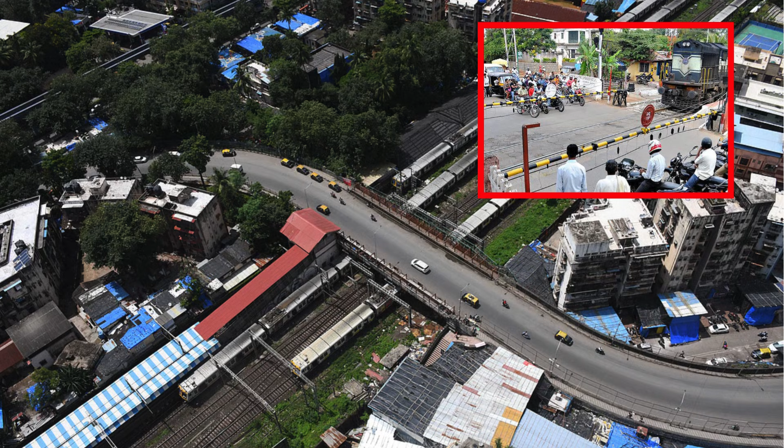Road-over bridges, also called ROB or flyovers, are frequently provided to cross railway tracks without having a need to wait for opening of a level crossing gate. They provide direct access across the railway tracks.

But once a decision is made to provide a road-over bridge, the next immediate question comes: what should be the width of the ROB deck? This video is about the same question. Watch till the end to understand all the three cases.

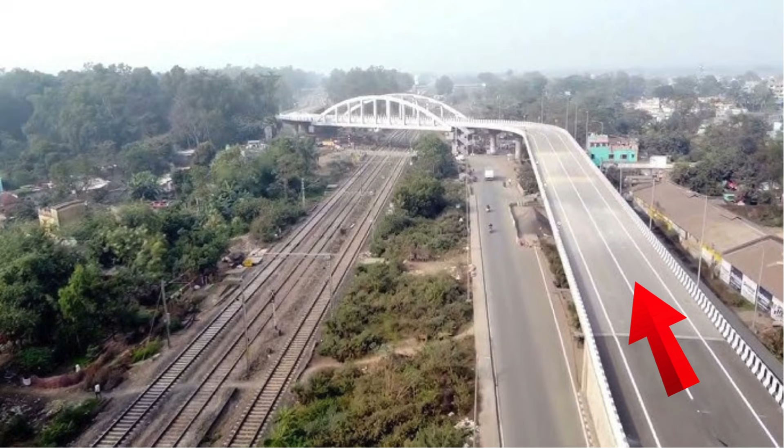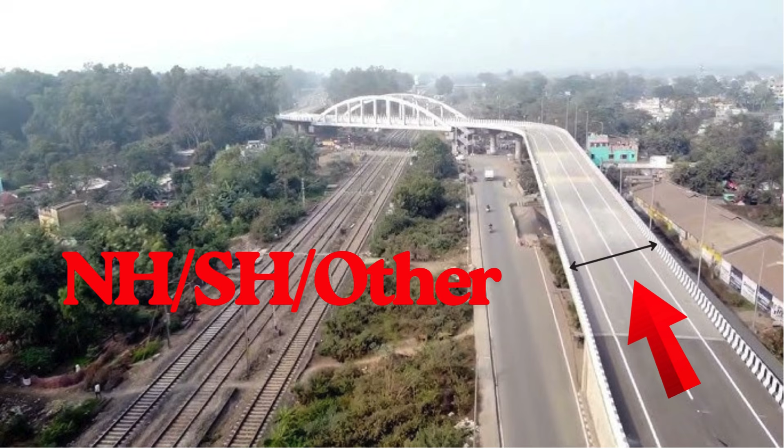The deck width of ROB is decided based upon the approaching road, whether this road is a national highway or a state highway or a major district road or a local municipal road. Basically, the carriageway of the approaching road or the type of highway decides the deck configurations of these ROBs. There are standard documents published by Indian Road Congress which can be followed to have guidance on this matter.

Bridge deck configurations of 6-lane and 4-lane national highways and 2-lane highways have been defined by Indian Road Congress, IRC, in special publications, SPs, published by them. The details of these special publications are as follows.

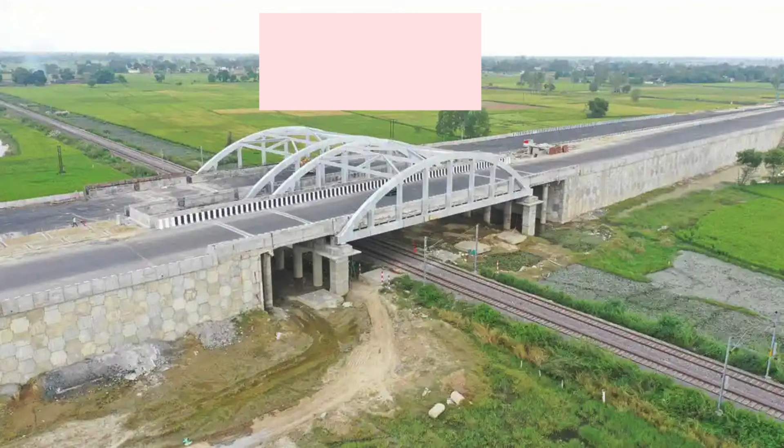6-lane and 4-lane national highway bridge girders are normally provided in twin arrangements. It means that for 4-lane highways, 2 lanes are provided on one girder and the other 2 lanes are provided on the second girder. It helps in minimizing the disruptions of traffic in case any emergency repair is required in one of the girders.

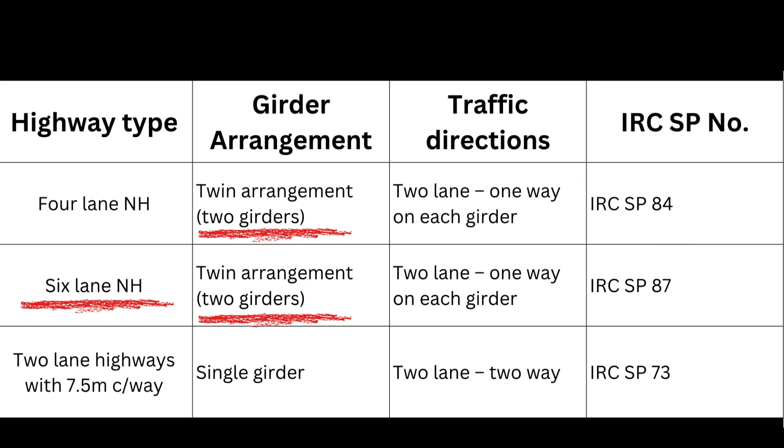Bridge deck configurations for 4-lane, 6-lane national highways and 2-lane highways are given in IRC SP 84, SP 87, and SP 73 respectively. Now we will discuss their deck configurations one by one.

Bridge deck configuration of 6-lane national highway is given in IRC SP 87 as shown here. As mentioned earlier, the arrangement is of twin type, 3 lanes on one girder and the other 3 lanes on the second girder. Each girder serves one direction of traffic. The carriageway provided on one deck is 14 meters. Footpaths of 1.5 meters clear width are provided on both extreme ends of the 2 girders as shown.

At both extremes of deck, 2 RCC crash barriers have been provided of width 450 millimeters. 100 millimeter extra projection of deck has been provided at both ends. The footpath and carriageway are separated by a double W-beam barrier of width 400 millimeters. If we add all these elements, the total RCC concrete deck width is calculated to be 17 meters.

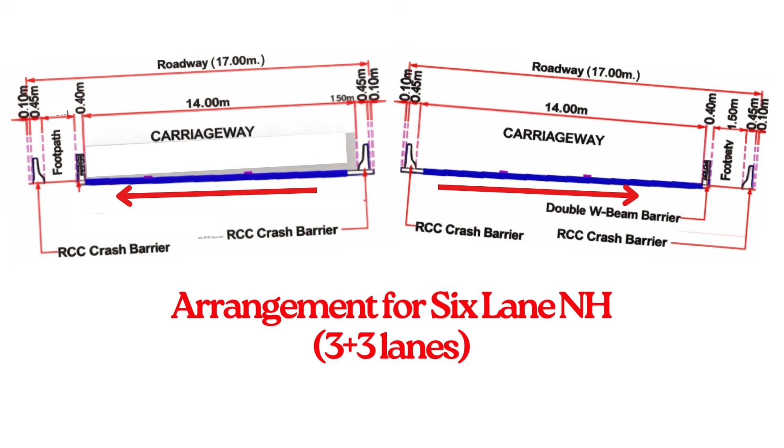One side slope has been provided in both girders. The direction of the slope is towards the outer side. So in short, it can be said that this deck has an overall width of 17 meters to accommodate a carriageway of 14 meters.

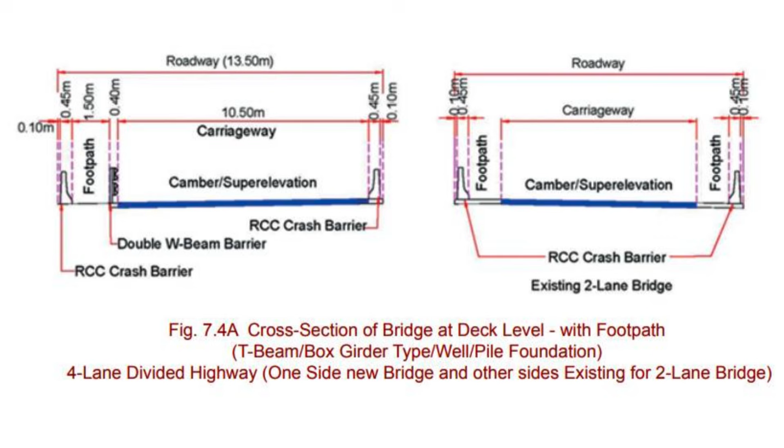Bridge deck configuration of 4-lane national highway is given in figure number 7.4a of IRC SP 84. As mentioned earlier, the arrangement is of twin type, i.e., 2 lanes on one girder and the other 2 lanes on the second girder. Each girder serves one direction of traffic. The carriageway provided on one deck is 10.5 meters. Footpaths of 1.5 meters clear width are provided on both extreme ends of the 2 girders as shown.

At both extremes of deck, 2 RCC crash barriers have been provided of width 450 millimeters. 100 millimeter extra projection of deck has been provided at both ends. The footpath and carriageway are separated by a double W-beam barrier of width 400 millimeters. If we add all these elements, the total RCC concrete deck width is calculated to be 13.5 meters.

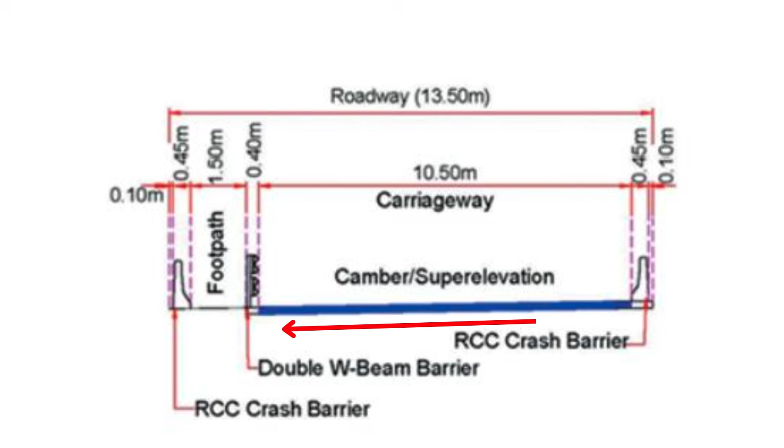One side slope has been provided in both girders. The direction of the slope is towards the outer side. So in short, it can be said that this deck has an overall width of 13.5 meters to accommodate a carriageway of 10.5 meters.

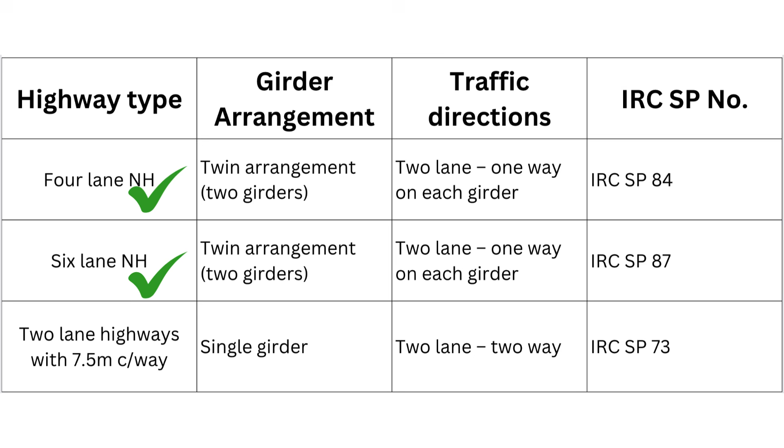So far, we have discussed 6-lane and 4-lane national highway cases. These bridge deck configurations can be adopted for ROBs being constructed over national highways. But in India, there are many cases where highways having a carriageway of 7.5 meters are there, and flyovers are supposed to be constructed over them. This single carriageway of 7.5 meters caters to both sides' traffic.

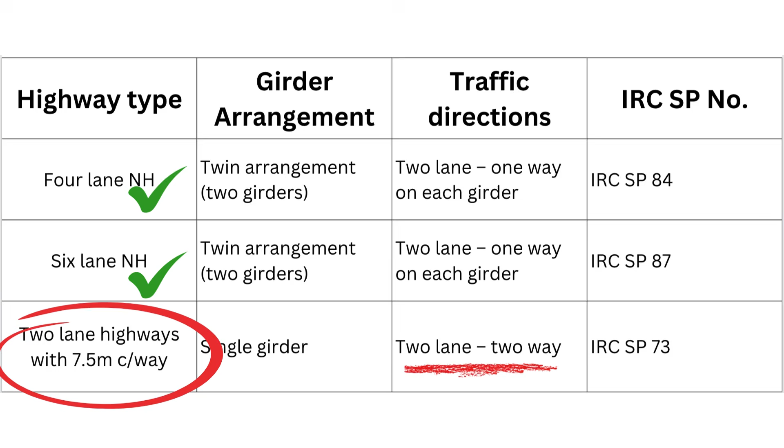Therefore, there is a need of having bridge deck configurations matching this requirement of 7.5 meters carriageway. This is specified in IRC SP 73. As flyovers and road-over bridges are normally constructed in built-up areas, Figure 7.5 of IRC SP 73 can be followed for adopting deck configuration in such cases.

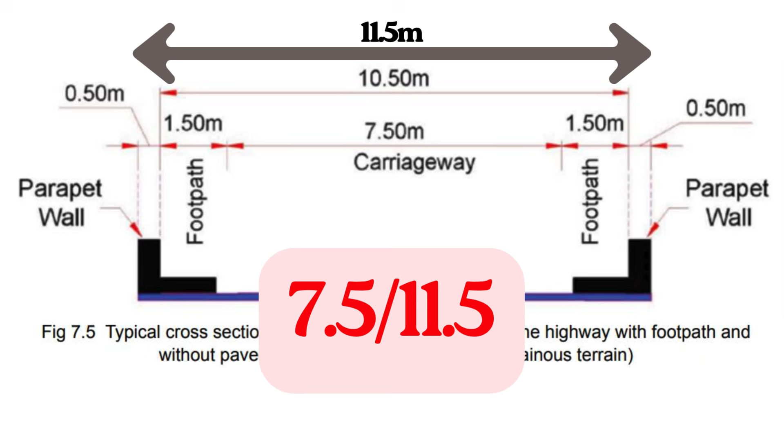Here, a single bridge girder deck is provided which carries 7.5 meters carriageway, 2 footpaths on both sides with 1.5 meters width, and 2 parapet walls at edges having 0.5 meters width. So overall, the total deck width becomes 11.5 meters. In a nutshell, a bridge deck of 11.5 meters is required in order to accommodate a carriageway of 7.5 meters as per IRC SP 73. To have a better arrangement, this configuration can be further modified as follows.

With this discussion, some general principles are emerging, which can be followed in general. Please remember these general principles that must be followed in deciding the deck configurations. If traffic on the girder deck is one way, then provide one footpath at the outer edge and keep the deck slab top slope towards the outer edge.

If traffic on the girder deck is two way, then provide two footpaths at both edges. Deck slab top will have both side slopes with crown in the middle. So this was all about the current topic.